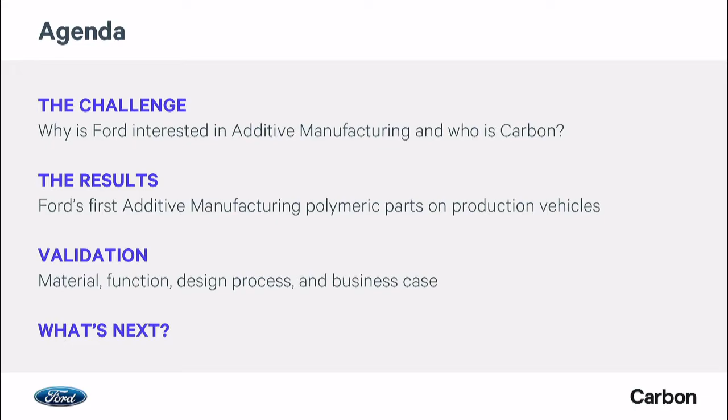So here's our agenda for today. We're going to go through and present together, with first the challenge. We'll start out with why Ford is interested in additive manufacturing, why do we care, and a little bit about the journey that we've seen with additive manufacturing yesterday, today, and tomorrow. Then I'll hand it off to Paul, who will talk a little bit about Carbon, the company and its technology and advantages. Then he'll introduce the 3 production applications in our results, where we're getting value from using additive manufacturing for our vehicles. And then I'll come back and talk about some of the validation details of how we validated the material, the function, the design, and the production process, and importantly, the business case. And then finally, we'll both talk about what's next for each of our companies.

So first, why do we care about additive manufacturing at Ford? Essentially, the attributes of additive manufacturing, namely that we can make a 3-dimensional part without the need of a mold or a tool, in addition to the design freedoms of those parts that we can make, provide us with values in efficiency, agility, and performance.

In terms of efficiency, as Pete mentioned, we've been using additive manufacturing for quite some time to make our design processes a lot more efficient, to go through quick iterations in our prototype parts because we don't have to wait for that long step of tooling. And as the technologies and materials continue to improve, we're able to go further along that functional testing and prototyping step, making our processes even more efficient.

And today we're also using additive manufacturing for those tools and fixtures on our manufacturing floor in our facilities to make those processes more efficient, not only to make the fixtures faster and more ergonomic, but those fixtures work better, providing us with efficient processes on the manufacturing assembly and a more quality product.

For agility, additive manufacturing technologies and their benefits allow us to more nimbly respond quickly to the dynamic changes in the market and our complex supply chain. For example, we can quickly respond to niche markets or low volume opportunities that we couldn't do cost effectively with a hard tooled solution.

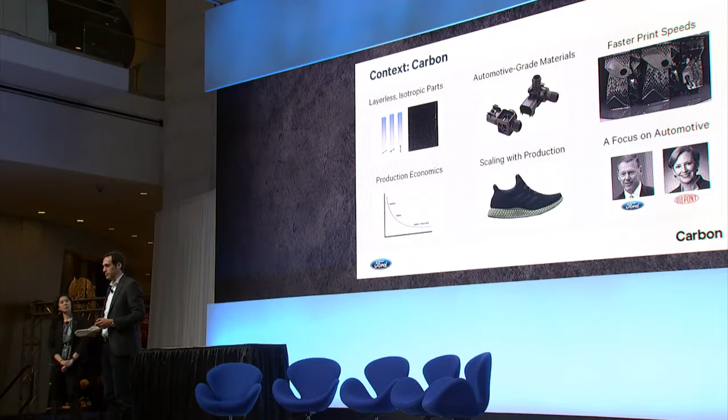As Ellen mentioned, we've been working quite closely, especially over the last year and a half, to help support Ford's goals of using additive manufacturing for production in order to improve efficiency, agility, and offer parts that have superior performance. We're going to talk about 3 applications here today that are production applications of end-use parts. The first we're going to focus on is an example of improved efficiency for service parts, for spare parts.

Additive manufacturing has long held the potential of being of great value for MRO, for service parts, for spare parts, especially for late model vehicles, for older vehicles. This application is an HVAC lever arm used to open and close vents in an HVAC system for an older Ford Focus. This part was originally produced with 30% glass-filled PBT material and injection molded.

But Ford needed to have some new parts made, and it would have been quite time-consuming and expensive to get the tool out and produce these new parts and then have those parts sit in a physical warehouse and have those parts kind of in inventory as well as on the books. So Ford qualified our materials, our epoxy material, as well as our process, and ultimately began producing these parts on demand from a digital file.

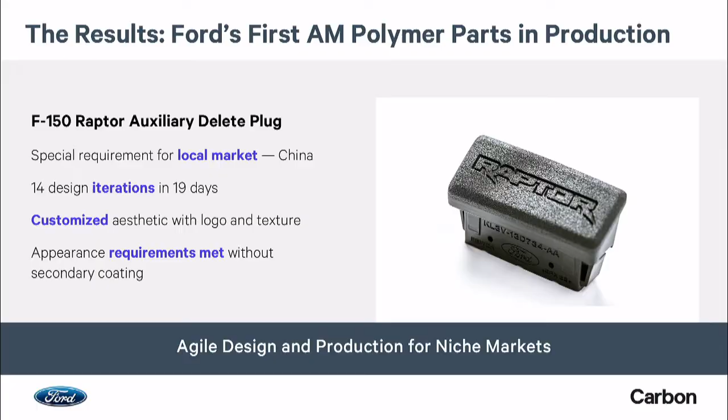It's a relatively low volume scenario for the Chinese market, and it would have been quite expensive and time consuming to stand up a tool, to design that tool, stand it up, and then produce the parts. One of the great values associated with our process is the ability to quickly design parts, print them, and then test those parts and be able to cycle through many different designs in a short period of time. That's what Ford was able to do here, going through over 14 designs in 19 days in order to design and test the parts that are now part of that F-150 Raptor for the Chinese market.

So they were able to get the right design, and during that process also experiment with different looks, different textures, different lettering, because all of that is essentially a free part of the process. It's just a digital file, so we can quickly and easily add textures, we can add logos. So the Raptor logo is prominently displayed on this delete plug, making it a visually pleasing and aesthetically nice part. This is just an example of how Ford is able to economically make parts for low volume production.

And then the third application we're going to focus on here is one that highlights the ability to take advantage of the design freedom that comes from an additive process, in order to produce a part that performs better, offering some superior advantage relative to what would be possible with injection molding.

This is a bracket that holds a cable associated with an electric parking brake system for the Mustang GT500, which was just announced earlier this week. In prior versions of the vehicle, the bracket would have been stamped out of steel, and there would be two versions, a left-hand version and a right-hand version.

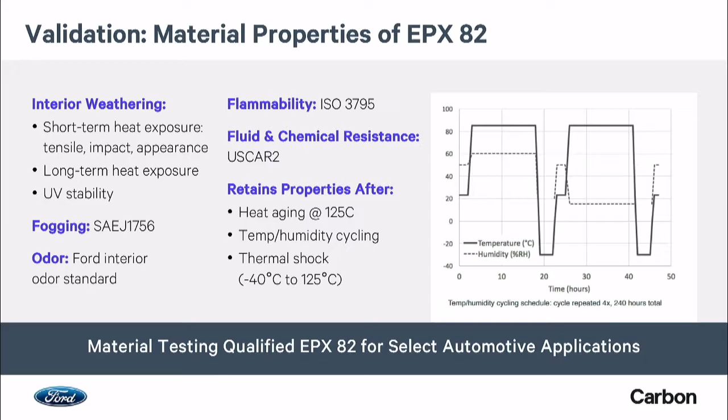For example, in our interior application with the Raptor delete plug, not only did we have to pass fogging, odor, and flammability, as do typical interior components, but the most challenging part was to pass all of our interior weathering specifications. So for that particular application, after exposure to the amount of UV that part is subject to, we not only had to retain properties, but also the appearance of the part, as Paul talked about, because there was no secondary coating protecting it.

For both the interior and the underbody application for the EPB brake bracket, we had to look at fluid and chemical resistance for all sorts of chemicals, ranging from suntan lotion for interior applications to motor oils for underbody applications, which all passed.

And then finally, for both the climate control application in the HVAC lever arm, as well as the EPB bracket in the underbody, we needed to consider elevated thermal performance and heat aging for different scenarios and exposures. So these families of applications that we tested are qualified for future applications as well for EPX82.

Great. So the next step was looking at the functional validation of each of the parts. These consisted of component level testing, vehicle level testing, as well as assembly level testing when we had to assemble the parts into the vehicles themselves.

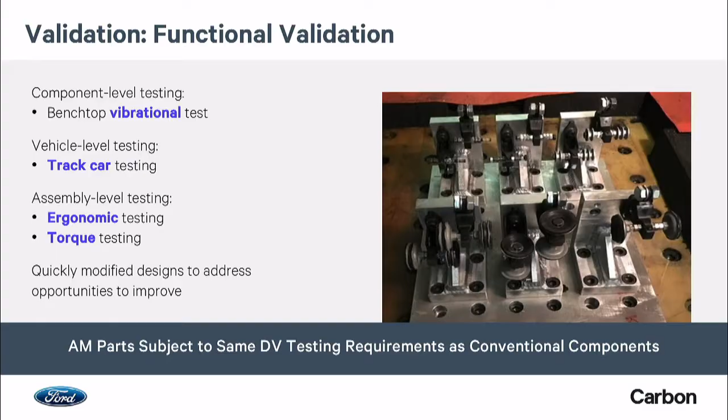In addition, things like on-vehicle testing on the track allowed us to test for any potential stone impact functions that the bracket would need to survive.

And finally, a lot of the ergonomic level testing that Paul alluded to, with the team of engineers, as well as torque testing for some of the loading for that functional part, were conducted. Similarly, for the lever arm, that function was tested as well. They're subject to all of the same design verification test requirements as our conventional components and did pass all of these.

Next was really to understand the validation of the process and the production manufacturing at a production level. The parts were designed so that we could ensure repeatable and reproducible results from part to part on the print platform, from print to print, and from machine to machine, to minimize any variations we would see in the parts.

Along the way, we created DFMEAs for each part per their engineering requirements, as well as PFMEAs to understand the entire process, following a standard PPAP, or production part approval process. This paved the way for future additive manufacturing applications, helping us understand the differences from conventional manufacturing. We did find some distinct advantages using the digital workflow of additive manufacturing over conventional manufacturing.

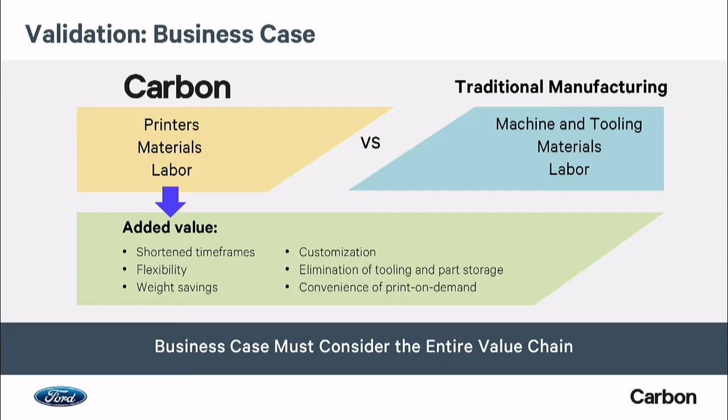To summarize, we found that the advantages Carbon's additive manufacturing technology provided, including the speed, the robust and durable materials, as well as the design freedoms we were afforded, allowed us to reach the goals for automotive value in efficiency, agility, and performance.

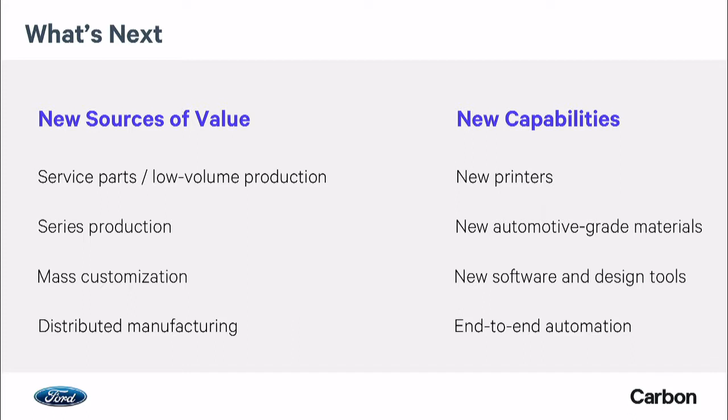So what's next? At Ford, we're continuing to look for new sources of value, continuing to migrate service parts and low-volume production where it makes sense, as the technologies and materials are ready and as we develop new, improved, faster, and robust materials. In addition, we're looking at series production applications, moving towards higher and higher volume, as well as mass customization, and then being able to realize distributed sourcing and distributed manufacturing to print what we want, where we want it, when we want it.

And I'll hand it over to Paul now to talk about what's next for Carbon. Thanks, Ellen.

Carbon recognizes that we're really at the early stages of this journey of moving to production applications in the automotive industry. The automotive industry appropriately has a very high bar of what's required. We're thrilled to now have Ford's first production applications using an additive manufacturing process for polymers in production. But we know that we at Carbon need to continue to develop our own capabilities and enhance what we offer.

That includes new printing capabilities, including larger build platforms and new features associated with our hardware. That includes, importantly, more and more materials for automotive applications. We have the EPX 82 material, which was used in these applications referenced today, and we have a roadmap of materials coming out this year and next year that offer different kinds of characteristics, higher temperature performance or different types of impact strength, as examples.

We're going to continue to develop more materials for the automotive market, which opens up different kinds of applications and allows you to take advantage of these capabilities for different parts. We also believe there's a lot of opportunity on the design side to take advantage of things like topology optimization and lattice designs, producing structures that weren't possible via injection molding.

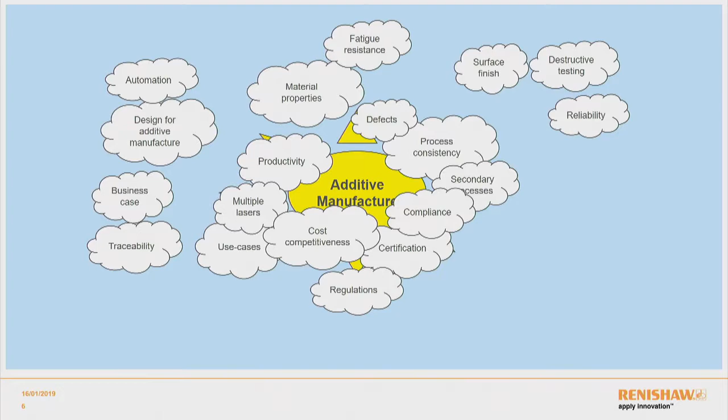Immediately, once you start drilling into those particular areas, we start having secondary areas where we need to drill down further into detail. Eventually you get to the point where there is no more hype because it can't actually shine through, and there seems to be this overwhelming need to fully understand the technology before we can incorporate it in our manufacturing environments, particularly in areas where we want volume production, such as automotive.

Renishaw has encountered this before in the metrology market. Renishaw is most widely known for our manufacturing of probes, CMM equipment, machine tool equipment, and automated gauging. So our business is process automation and control. That's where people generally know Renishaw. Whenever we show additive equipment, the number one thing people say is, oh, I didn't realize you did 3D printing as well, I always thought you guys were just the probe guys. So in order to change that, we're constantly putting out this message that automation of process and control is what additive is all about as well.

So in order to bring the technology into widespread use, Renishaw is ideally placed with our history. One of the ways we went about achieving that with industrial metrology was through this ethos around the process control pyramid, wherein the products we designed and developed could be categorized according to the role they filled in the manufacturing environment.

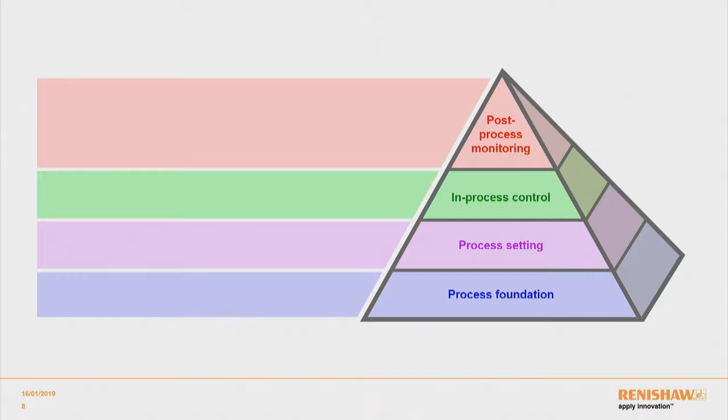So for example, in the process foundation, we're talking about calibration and performance products, such as our ball bar products or our laser calibration products. We're actually trying to make sure that the machines we're working with, CNC mills, lathes, whatever, are actually capable of achieving the tolerances we're aiming for in the first place.

Secondarily, we've also got machine tools, so we're talking about process setting and in-process control. This is the idea of making sure the workpiece is actually set up as we require, the tool is behaving how we require, and we're monitoring tool wear and adjusting accordingly.

In-process gauging as well, so you're taking the part off the machine onto a gauge and very quickly, in an automated fashion, getting an understanding of how in control the process is. So we can very quickly identify whether we need to make adjustments to the process on the fly, for example incorporating or modifying offsets in response to tool wear and things like that.

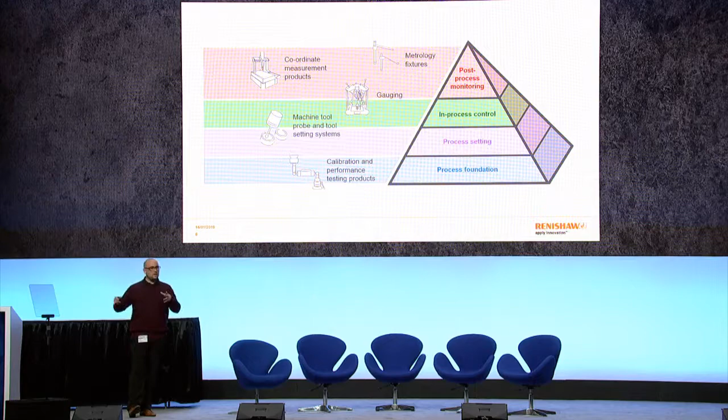And then finally, the stuff Renishaw was always best known for was the CMM inspection equipment and stylus equipment, but also the fixtures on which all of this metrology work is done. It's no good having all this fancy equipment if you can't trust the means in which you're setting it up in the first place. So Renishaw moved into developing those products as well.

So without veering off too much into metrology and the deep darkness that can go on there, what I actually want to do is tell you how with additive we're taking this similar structured organizational approach and trying to apply it to a technology that can, on first appearances, be so vast and complex as to appear impossible to get under control.

So the process foundation equivalent for Renishaw is our solution centers. In our solution centers, we're all about a two-pronged approach where we're developing competence in our customers, and that's not intended in a pejorative sense. That's saying competence is knowledge through education, skills through training, and experience through practice.

Secondarily, we're then working on developing the solution our customers are using, actually working in the technological sense of developing a product for a specific material processing strategy and a specific platform.

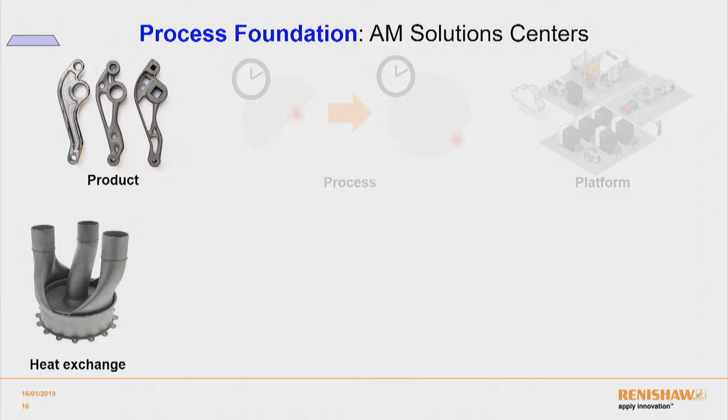So in terms of product design, we're talking about a handful of specific application types. Whether we're working with HIETA in heat exchange products, or with competitors in the America's Cup on hydraulic control devices, or with Ferrari Formula One on engine components, or with automotive partners in the development of productionized solutions for production volume of AM components.

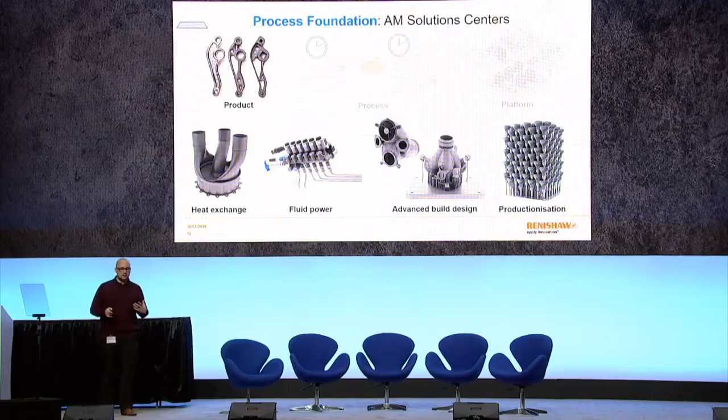In terms of process development, we're working on helping our customers understand how to develop the alloys of the future. All of the additive players provide standard parameter sets for processing the various powders available, but Renishaw goes a step further, providing customers with the tools to actually develop their own material properties for specific applications—alloys that may not even exist yet.

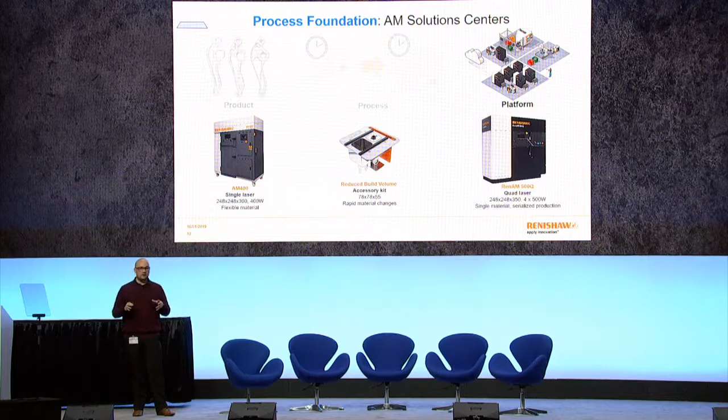None of this is worth anything without selecting the correct platform for the processing to take place on. Whether that's one of the single laser flexible material machines everybody is familiar with in the industry, or one of our multi-laser systems where we're increasing productivity massively to meet the demands of the automotive industry. In between we have accessory kits where we can reduce the volume of powder required for development work. So rather than committing to hundreds of pounds of powder, a company can start doing development work with maybe a dozen kilos or pounds of powder - much smaller volumes, much less investment up front, all done on a Renishaw premises with Renishaw staff, enabling much faster cycle development times.

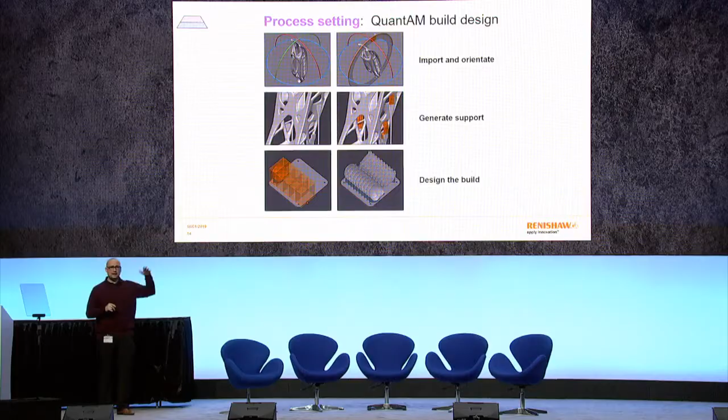Our equivalent in additive of process setting would be the build software we use to actually generate the build designs. Renishaw's solution to this is our QuantAM software. Practically speaking, build software is build software - they all pretty much do the same thing, and QuantAM's no exception. It's not necessarily doing anything over and above what competitor software does - in fact, in many cases competitor software has features QuantAM doesn't have. But the reason we developed QuantAM in the first place is because it was a stripped back, ready-to-use piece of software for our machines where we trimmed off all the fat. We only put in features relevant to our users of our equipment. But it also meant that tools that exist in other software packages could be developed specifically, and their performance could be improved and increased when a user is using a Renishaw platform machine.

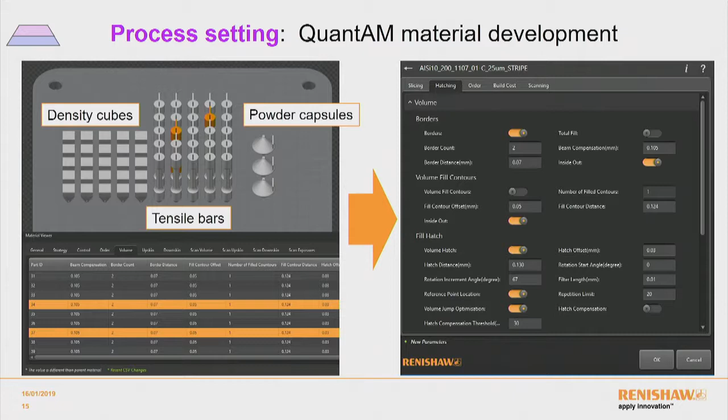For example, our material development tools within the software, which we train our customers to use so they can develop their own alloys, give us the ability to very rapidly iterate and adjust laser parameters - things like power, point distance, exposure time, all of these variables. In fact, in the Renishaw equipment there are 174 different variables that can feasibly be adjusted, so the user can produce a distributable parameter set that can be locked down and distributed within the manufacturing environment of the company.

Similarly, for the multi-laser systems, because we've developed our own software, we have our own means of enabling a user to assign lasers in the build volume. Two examples here might be where you have a number of parts on a plate and then a single large part. In our software, that enables you to go with a number of different strategies - for example, assigning one laser per part, which is typically the most efficient way to do it, particularly when operating in multiples of 4, when you have 4 lasers. But things to bear in mind when using multiple lasers and multiple parts is how those lasers interact with one another - that's where material development training loops back around and that iteration work gets involved.

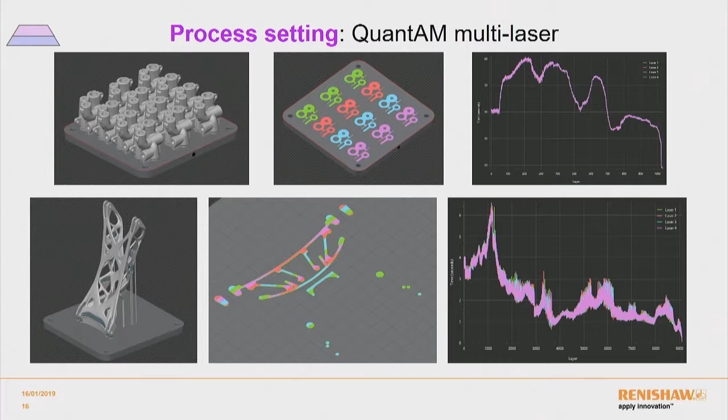Also, when using multiple lasers on a single part, you're interested in how the lasers interact at the boundaries of the area where they're scanning on any given slice. These are all factors that need to be taken into account, as is the actual utilization of the laser. In the example with the 4 hydraulic manifolds in the top row, we're assigning one laser per part and scanning left to right, which gives us the best utilization - you can see there's no overlap between any of the 4 traces. In the bottom traces, there's overlap where lasers are idling during any given layer. It's through software tools in QuantAM that we can help minimize those idle periods.

In-process control is one of the buzzwords going on with additive at the moment. The fact of the matter is that there isn't really a great deal of in-process adaptation and closed-loop control going on in the additive industry. And what there is, it's iffy at best, okay?

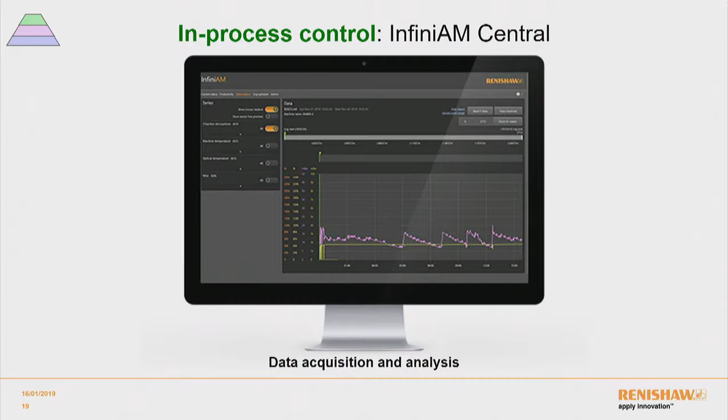Renishaw's approach at the moment is two-pronged. We have two products in particular: InfiniAM Central, which is essentially a data capture and data acquisition device, and a data interrogation device. For example, seeing the status of machines in a workshop, the productivity of those machines, the sensor output like temperatures, pressures, voltages, allowing remote troubleshooting, particularly useful in large manufacturing environments where service engineers might not be on site. We can potentially help to remotely diagnose issues. But also the need to have access and administration controls for various aspects of the manufacturing process, so uploading files, accessing data, and so on.

And also everybody's got to have a mobile app, because it's 2019.

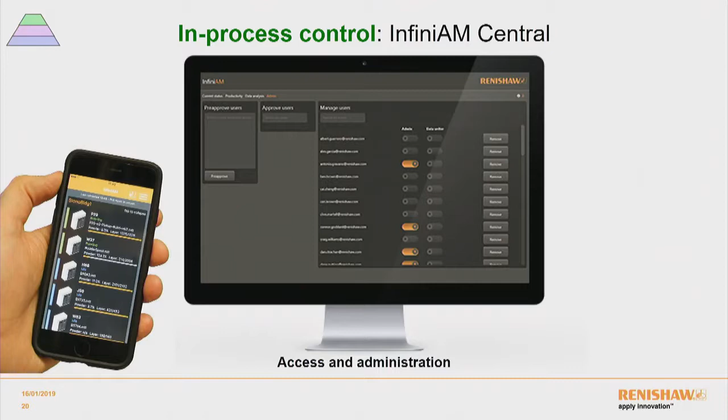The other aspect of in-process control is the one that's getting everybody excited. It's where we're actually capturing data directly from the build itself. Because Renishaw is a manufacturing company in additive, which is somewhat unique in that our machines are manufactured entirely by us. We're not a black box user wherever we can help it. That means the degree of vertical integration we can achieve with our products goes far beyond what else is happening, okay? And that's a double-edged sword, because it means not only do we have total control over what we're doing, it also means we're learning all these lessons on our own, and going into areas that have never been touched before.

So one area where that's particularly exciting is that we 3D print components for our own machines. The 500Q Galvo block for our 4-laser system is actually printed on the machine itself. We have prototype machine 1 that started printing the others, and so on and so forth. The benefit is that additive design ideals, such as conformal cooling and geometric complexity, are incorporated in the design of this component, allowing us to make a much smaller unit and get the lasers much closer together, processing through a single window.

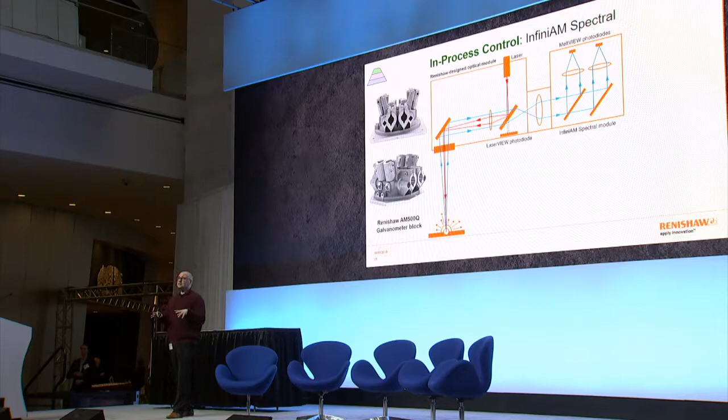Without going into too much of the nitty-gritty, what that means is any single laser in our 4-laser system can scan anywhere in our build area at the same time. So in theory, all 4 points could follow each other around a single spot if we wanted them to. Many competitor systems can't do that, because each laser has a separate window, and the build area is actually split up into different areas addressed by a single laser. So we have the flexibility to do very different things.

Another thing that gives us flexibility is the ability to insert and install laser sensors and melt pool sensors inside the machine directly, because we design the galvanometric system ourselves, so we're not having to compromise. For example, our InfiniAM Spectral system has LaserVIEW embedded within the system, but we also have MeltVIEW embedded directly in the system. That gives us the ability to get feedback on energy emissions, but also feedback on positional data as well.

That means we can start building 3D models of data that we can go and view post-process, viewing two builds side by side and comparing the data. In other words, what we have at the moment is an in-process gauging system, like our Equator system functions in a manufacturing scenario, where we can actually check the performance of the machine during a build and, in theory one day, make adjustments as we go.

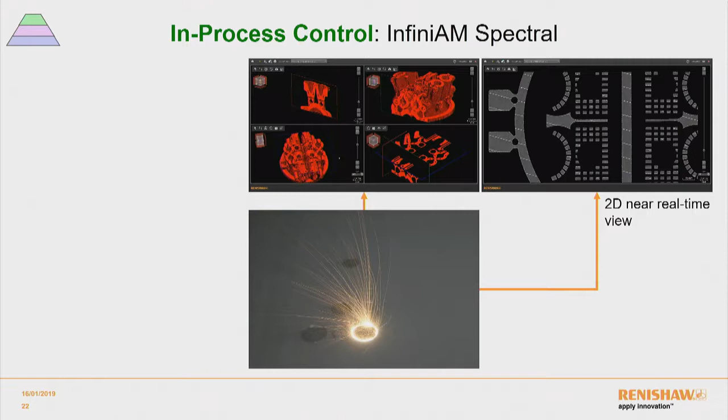Okay, so some example outputs. You've got your melt pool there. What we actually get out in the data format, we can, at the end of a build, program into a 3D rendering, which allows us to zoom in, slice layers and things like that. But immediately, almost in near real time, actually at the end of a layer when it's compiled and uploaded, we can view 2D data pretty much immediately. The 3D data at the end of the build, we can then start rendering the full model and comparing it to the slice data that we generated.

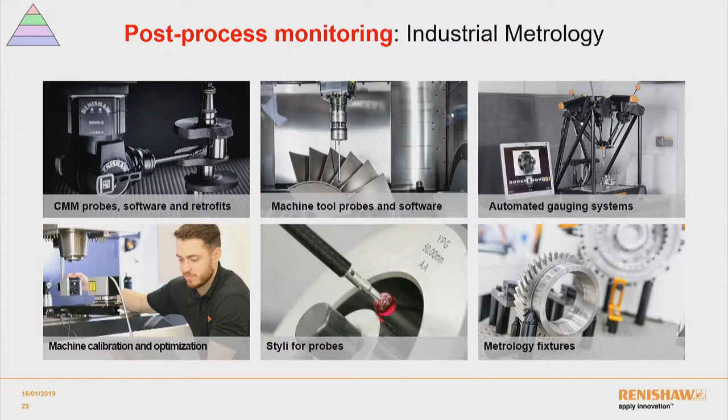And then the post-process monitoring of additive is obviously a large area. I'm not going to spend too much time here, because at Renishaw, that's what we do. So we don't really need to spend a great deal talking about it, because people know that that's what we do already. The inspection and control of machined parts in particular, but also increasingly additive parts, we're already set up to provide the solutions for that as we go.

So to summarize, because this is the kind of topic where I was hoping we'd get plenty of questions, basically the solution we see for additive is very similar to the solution we see for metrology, in terms of an organized structural approach to the number of problems additive can raise. Whether it be process control, process inspection, design for additive manufacture, or development of new alloys.

Renishaw has got a global overall strategy for trying to handle that development and ensure the customer gets back through to seeing that bright hype again, and getting excited about the technology rather than nervous about it. So with that, I'll wrap up the presentation, and if you guys have got questions, we've still got 10 minutes to go through some.

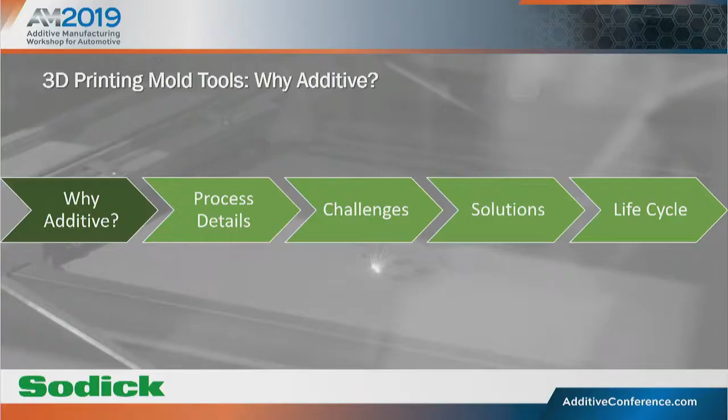So our big focus at Sodick is in 3D printed mold tools - injection molding tools and extrusion dies, that sort of thing, that utilize 3D printing to innovate and improve the performance of these tools. Probably the biggest thing most of you are going to be familiar with when it comes to 3D printing mold tools is conformal cooling.

It's a topic that there's been a lot of buzz around, but I think in terms of industry adoption, it's still been a little reticent compared to where it can be given the substantial gains we can make. As part of this presentation, I'll cover what these gains look like, what the process is to produce these additive tools, and also what some of the challenges are that have inhibited progress to this point, as well as some solutions to get around those challenges.

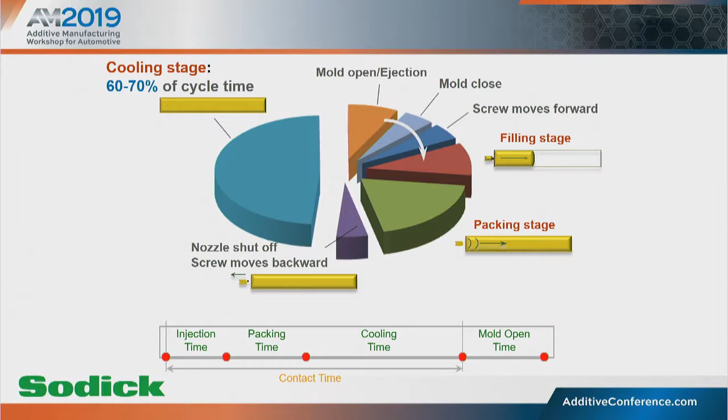So the reason conformal cooling has been such a big topic comes down to what the actual cycle of a plastic part looks like. When you look at the cycle of a plastic part - mold open time, mold close time, filling stage, packing stage - these all have relatively small times within that total molding cycle. Where you actually see the biggest time waste is in the cooling stage, which at its worst can take up to 60 to 70% of the total cycle time of that plastic part.

But this is actually an opportunity for improvement moving forward, because if you have this disproportionate time scale for the cooling stage, it means any improvement you can make to that cooling stage will also have a disproportionate effect on the total cycle time of that plastic part. So this creates a really great opportunity for reducing cost and improving efficiency of manufacture of those plastic parts.

Looking at one example, this is a seatbelt clip that we've actually been producing at Sodick for one of the large automotive manufacturers. In our original design, we used standard two-dimensional gun-drilled water lines. But that design had about a 20-degree delta from the hot spots on the surface of that mold to the coolest points on the surface of that mold. And what that ended up doing is giving us deformation of the part that was more than a millimeter, and a relatively long cycle time for what the part was.

In the course of switching over to a 3D printed mold that used conformal cooling, we virtually eliminated those hot spots. We created a delta that was basically 1 digit rather than 20 degrees, and we were able to eliminate the projected deformation of that part down to 0, which is quite successful. In practical terms, we reduced the scrap rate of those plastic parts while also improving the total cycle time by around 22%, which is pretty substantial.

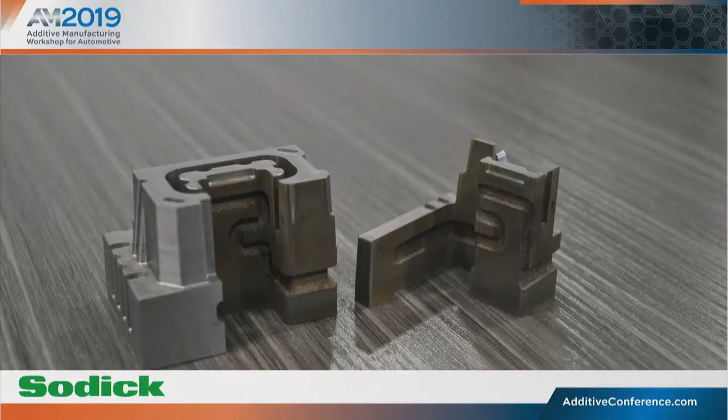Let's talk about another example. This is an electric vehicle connector mold which we've also produced. You can see in this cross-section the conformal cooling lines - they're actually built into the mold itself.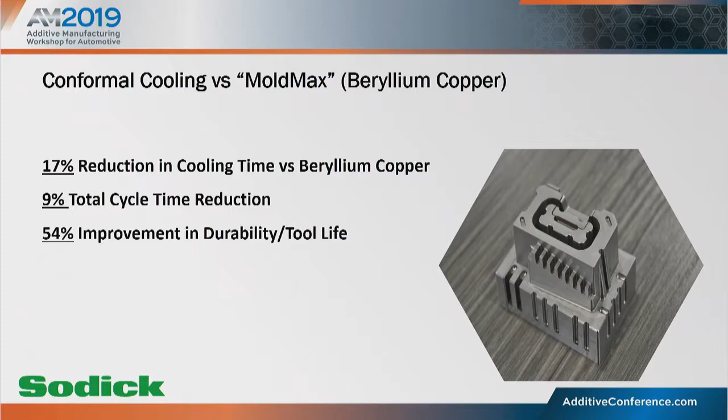One of the questions that comes up, and this is a great example, is comparing conformal cooling - being a new process that requires a steeper learning curve and some specialized equipment - to existing solutions. Why not just use a beryllium copper or some other specialty material with really great thermal properties to make an insert, as we've traditionally done over the past decade or so?

Well, the reason is this. Not only is beryllium copper and some of these other specialty materials expensive and difficult to work with traditional EDM equipment, partially because of that conductivity, but the performance gains still are limited. What we see here, even with conformal cooling versus beryllium copper, is that conformal cooling produces still a 9% reduction in total cycle time of that mold.

But where you see real gains is you actually improve the life of that tool by over 50%. That means a tool that would have gotten 20,000 shots could now get 30,000 shots by switching from beryllium copper to a 3D printed steel.

So that's some of the impetus for where the added value can be for 3D printing. But in order to really understand where it can be and what some of the challenges are for implementation, you have to dive a little bit deeper.

The process itself is relatively straightforward. Most powder bed 3D printers, which make up about 80% of the market, operate in fundamentally the same way, where you have a stationary powder bed of 20 to 40 micron powder that is selectively melted by either an electron beam or a laser, producing a melt pool in the profile of the part you're creating. You then add new material on top, use that same laser to melt in profile on top of the previous part, and those two layers bond together.

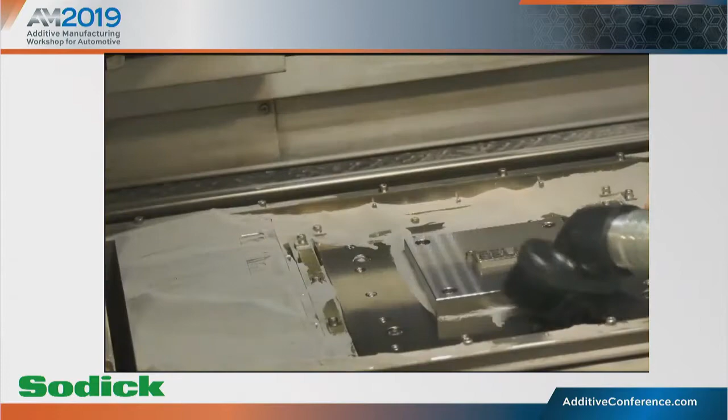But here you can see the final layer being sintered as well as machined in process to produce your finished part. So after evacuating your chamber, what you ultimately end up with is a solid piece, which in this example is just essentially a trinket or a test part. But those hollow spaces could easily be conformal cooling channels, detailed surfaces, anything that you'd need it to be.

So the process is mostly straightforward. So why has it been such a challenge for the most part to implement some of these really revolutionary technologies and experience the gains that you could achieve?

Well, probably the number one limiting factor has been the limited accuracy of 3D printers up to this point. So in general, 3D printing has been considered a near net shape process, so you're never really able to achieve a finished part historically. Because of the internal stresses and the lack of accuracy from the lasers, normally you'll have to leave machining stock on that part. Heat treatments for these parts, which normally has to be done, will cause movement in the steel.

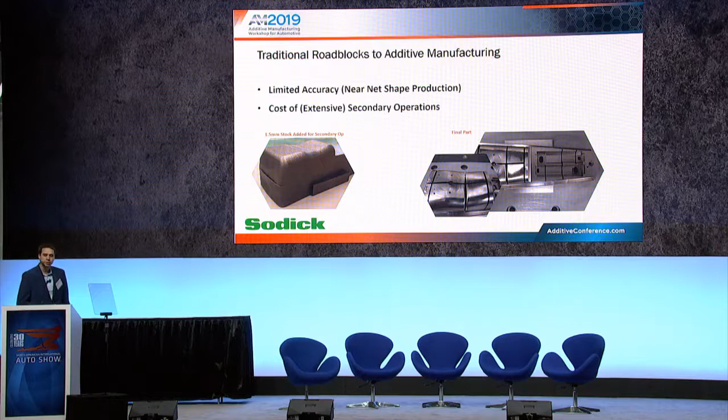The lack of laser accuracy leaves a pretty rough surface finish, so we're leaving, in general, about a millimeter and a half of machining stock on top of these parts, just to ensure that those conformal cooling channels are in the part and that those surfaces can be equally accurate. So you can see here on the left, we have the as-printed part, which is basically just a solid piece of rough steel, versus the finished part, which has considerably more detail. It has deep ribs, it has through holes, lots of features that aren't reflected on the part as printed.

One of the problems with this, in addition to adding extra processes, is that it adds significant cost. So you've added the cost of purchasing and utilizing a 3D printer, but now you still have to do your machining, you still have to do your stress relief, you still have to do all of these other operations that you normally do in order to produce a 3D printed part.

One of the biggest challenges in achieving that has been the internal stresses of that part. It is a hot process done layer-wise, which means there's going to be a thermal gradient across that part, which is going to cause those stresses to express themselves in unusual ways.

One of the other roadblocks for using 3D printing for producing mold tools is the impact that it has on venting. So a lot of streamlined designs for mold tools allow you to reduce assemblies into a much lower number of components for those tools. Part of that process ends up eliminating a lot of the parting lines that would traditionally allow for venting of those molds. The incentive for using those lines for those molds is that you're going to be able to improve part quality, you'll reduce overshot, you're going to reduce burn marks - a lot of these elements that would reduce part quality and end up increasing your scrap rate.

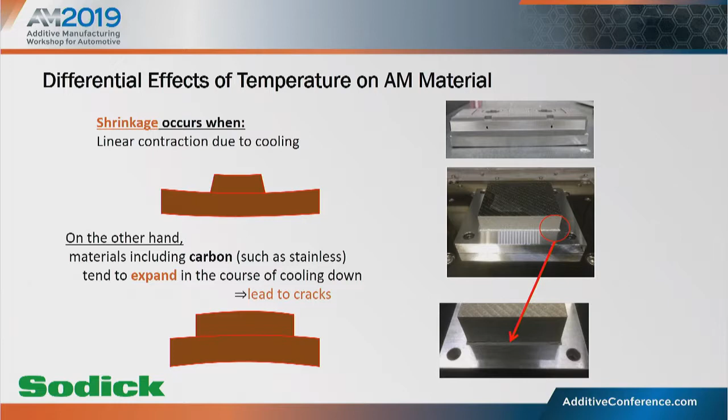Depending on the material you're using, it can have differential effects of temperature on that material. Materials that lack carbon will have very traditional linear contraction when it cools and linear expansion when it is heated. So as that part is cooled after that hot process, you'll see the part contract and have almost a potato chip effect. Whereas materials that contain high levels of carbon actually see expansion during that cooling process because of some of the changes that are occurring in the microstructure of that material itself.

This is one of the biggest challenges of trying to predict the thermal deformation of those parts as they cool after they've been printed. And this is one of the reasons for leaving so much machining stock on those parts.

But in part, these transformations are actually predictable based on some of the chemical composition of those parts themselves, particularly carbon, which has a very predictable change in the crystal structure that will determine just how much it expands during the cooling process. Which means if you can balance that expansion with the anticipated shrinkage due to heat, you can actually achieve a much more stable part and have a much more reliable tolerance across that entire part.

What that means ultimately to you is that your lead time is reduced, your part quality goes up, and ultimately 3D printing looks like a much more achievable option.

So in 2018, just this last year, there was a patent issued on this technology to Sodick for stress relieving in process some of these high carbon steels.

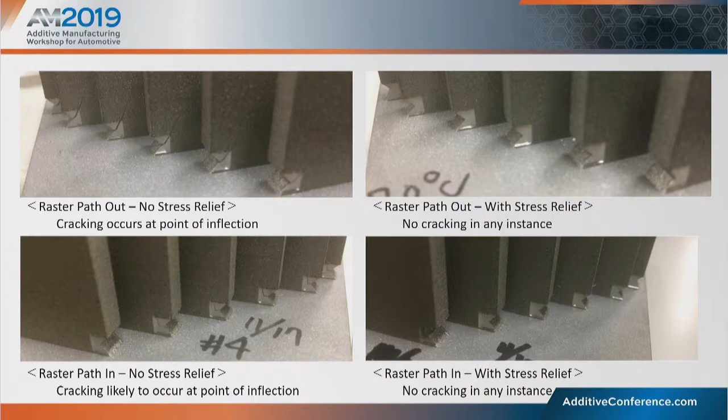So what does it look like using this stress relief process versus not using it? On the left, with no stress relief process, it's very predictable exactly where cracks will start to form due to stress. You can see these notches, these points of inflection, where cracks traditionally form. But on the right, you can see these very same notches, and there's no cracking occurring in any instance on any of these test samples.

All of these tokens are produced stress relieved before they ever leave the machine, which means you're not worrying about cracking, you're not worrying about that part changing shape after it's been made, which means the amount of machining stock and secondary operations you're performing is significantly reduced.

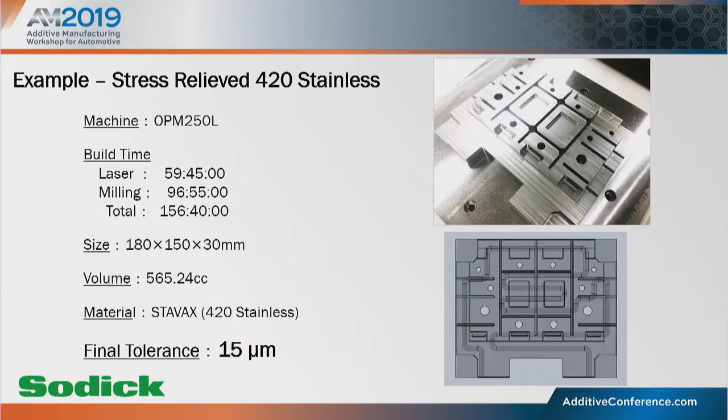Here's an example of a part made in 420 stainless steel, a material that's been a real challenge for a lot of 3D printer manufacturers because of how sensitive it is to temperature, with a very high rate of change across the part as temperature changes. This part is about 180 millimeters by 150 millimeters, and across that entire length, after removing it from the base plate and the machine itself, it maintained a tolerance of about 15 microns, which for a high carbon steel is unheard of.

This type of technology has a lot of application for not only other high carbon steels, but also other materials that have unique properties when exposed to temperature or unique problems of internal stresses. So it creates a lot of opportunity for new and innovative materials that have previously been a real challenge for the 3D printing industry as a whole.

This creates opportunities not only for exotic materials, but also those materials that are very well known to tool makers, like D2 and H13. Looking a year down the pipeline, they might look a lot more reasonable than they have to this point, where they don't exist.

Going back to the issue of venting, we can talk about controlling some of the characteristics of that metal based on the build process. A lot of the time, high density is very desirable - a high density part is more durable, and you can get it to a higher polish so optical molds can be achievable. These things are all very desirable. But when it comes to venting a part, sometimes that porosity can actually improve the performance of that part, in situations where you're getting burn marks because of gases that aren't being released.

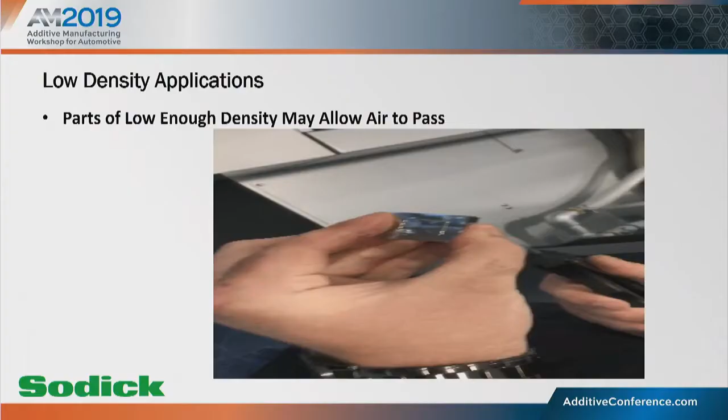You can actually see here a piece of steel we've 3D printed, where you can see air passing through the pores of that steel. So actually being able to characterize the properties of these materials based on the settings you're using - the laser speed, the laser power - having these known variables lets you selectively control certain areas of your part in order to produce optimal venting conditions.

This is another area where design consolidation and streamlining your mold design doesn't have to mean worse venting. It can actually mean improved venting.

Finally, let's talk a little bit about the mold life cycle. There are a few specific questions that come up repeatedly, one of which is caring for a conformally cooled mold. A mold with very straight water lines can seem a lot more straightforward to clean, and a lot of the time people will wonder, if I have this very serpentine cooling system in my mold, how do I get that cleaned?

There are actually a lot of products on the market commercially available that are more than capable of cleaning those water lines. One - not even a Sodick product, but just one we happen to use - is called water reamer, which basically uses pressurized water with a little bit of acidic additive to run through those water lines and clear out a lot of the corrosion, a lot of the scale buildup, regardless of the internal geometry of that part.

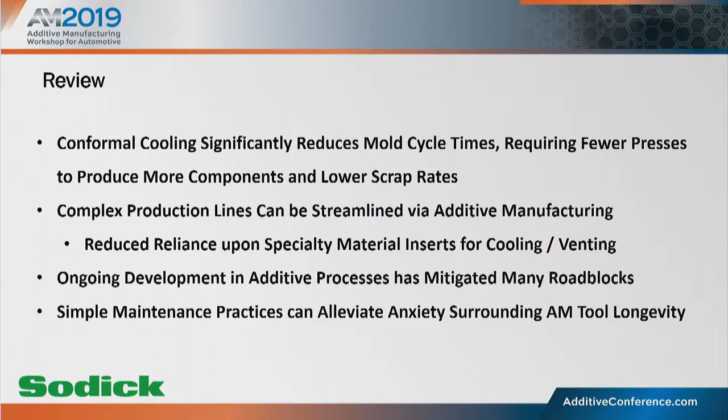So just to review, conformal cooling has real impact on the cycle time and the cost of plastic parts being produced. But there are certain roadblocks on the path to having full implementation of 3D printing processes for your mold tools. Ongoing development in the 3D printing technology can improve your tolerances. It can improve the life of your mold. And I think that taking a step back and seeing the forest for the trees can actually allow you to see that maintenance of these molds is not as complicated as it might be perceived to be.

There's no reason that cleaning water lines or repairing a mold is any more difficult on a 3D printed mold than it would be on a traditional mold. So I think some of these roadblocks might be simple perception errors, and some are just the state of the technology as it's been previously. But by keeping an eye on the future of the technology, the new patents coming out, the new features coming out, I think we can see a lot of ways where roadblocks that might have made you think twice a year ago might be non-issues today. Or they might be things you want to take a second look at now and see, is this something I can get real value from based on the technology that's available?

One thing I do want to point out, we do have a local supplier right here in Detroit. Proper Group is a supplier of mold tools and plastic parts. They utilize 3D printing technology for these types of applications. So for people interested in experimenting a little bit with the technology, but that maybe want to get their feet wet before investing close to $1 million in a machine, going through a vendor like this might be a great way of experimenting with some tools that could add value without exposing yourself to some of the risk of investing before you're ready.

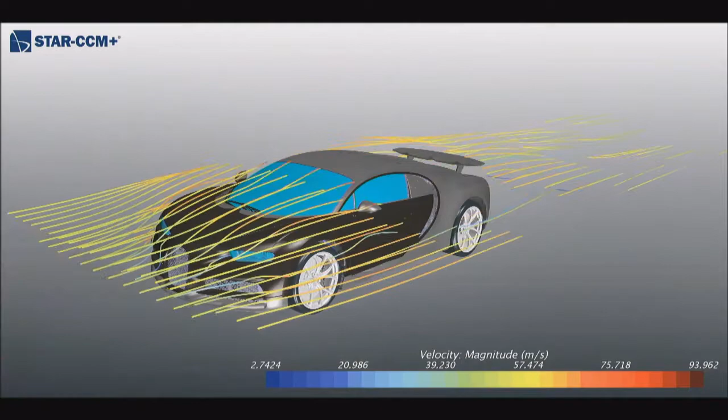So one of the challenges was: for a vehicle that goes that fast, the wind tunnel only has a capacity of roughly 186 miles per hour. So how do you design something when you can't actually get the data within the wind tunnel?

What we had to do is create a digital twin of the vehicle, then collect the data real time from the drivability of the current vehicle, and take that data and import it into the digital twin of a digital wind tunnel. So we use the simulation capabilities to simulate what would happen at 280 some odd plus miles per hour.

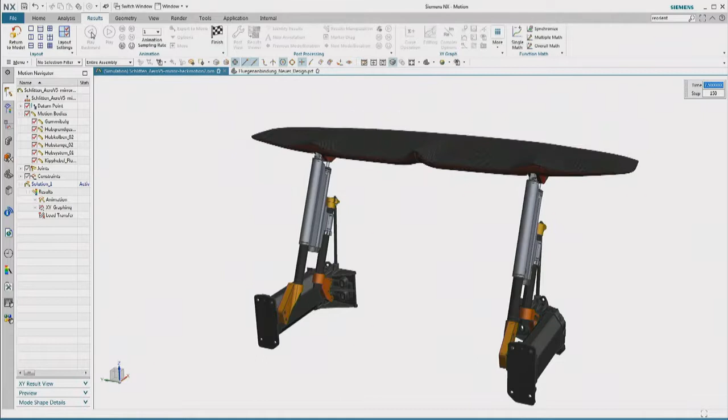So when you look at the wing on the Bugatti, it serves a number of purposes. It allows the car to be more stable at different speeds and driving dynamics. But at the same time, it also functions as an air brake. When you're north of almost 300 miles per hour, you're going to have to stop quickly, and the brakes are going to need a little bit of help. So that's what you see here, a simulation of that in the actual CAD.

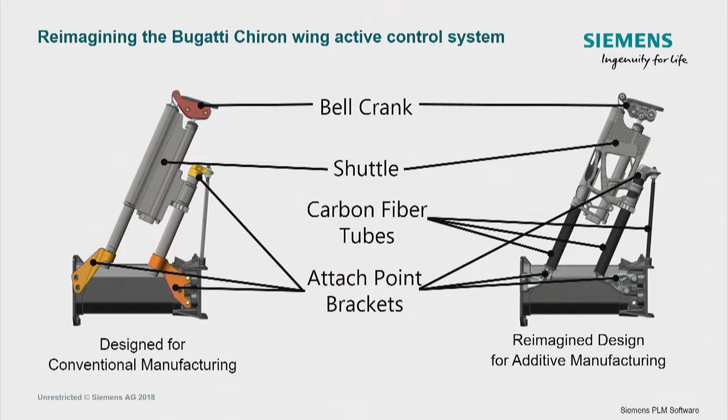Working together in partnership, what you see on the left-hand side is the original design, pretty much hindered by conventional manufacturing modes - you had your limitations, and this is what the design looked like. As we went through the whole design for additive manufacturing process, you see the reimagined design on the right-hand side, considerably different. If you look at the bell crank, the shuttle, you see a lot of material removed, light-weighted. The tubes are now made out of carbon fiber, and the attachment points have also been light-weighted. Considerable difference.

So how did we get there? If you look at our whole process of what we call the digital enterprise in creating a digital twin of a product, we want to make sure we do everything in a virtual environment that we possibly can, from designing the part to actually simulating the product, validating that design, and then when we get into production, validating the production component.

In this case, we're using one product to actually do the design and validation, and then as far as printing, to validate that print process in the virtual environment in the build envelope, so that when we get to the point of real production, we don't have a lot of surprises.

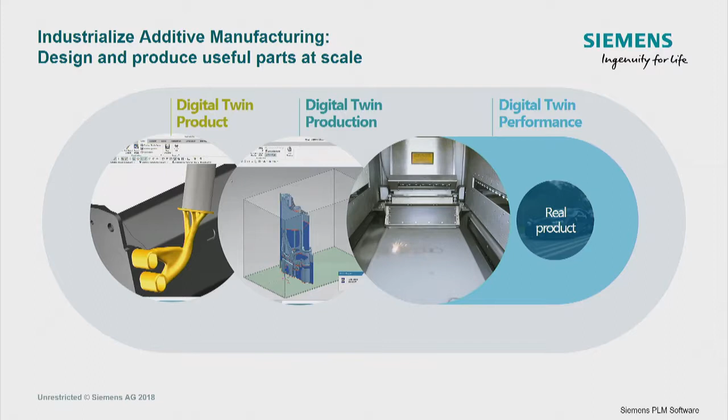In a conventional mode, we've been doing this for a long time, managing the entire process and validating. Specifically, a lot of our customers, before they put a shovel in the ground, already know what that product is going to do, how the manufacturing facility is going to look, and what type of production capabilities they're going to have.

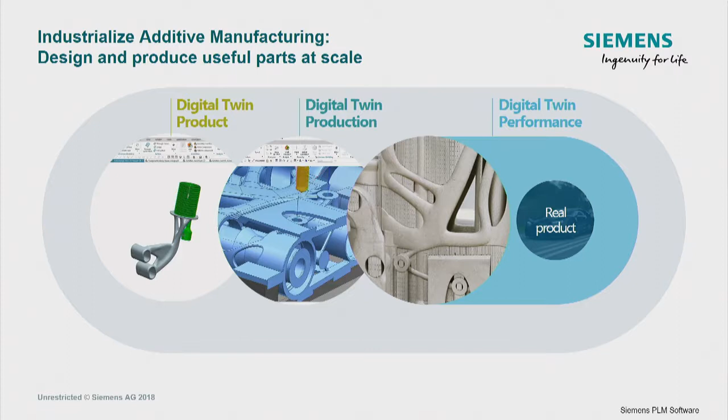So we're doing the same thing now for additive. By the time you get to the product out in the field, we're able to monitor that product and take that feedback from the field, from manufacturing, from the simulation, and continuously bring that back in for a closed loop system back into the design.

So you're doing continuous improvement over and over again on your products. That's particularly important for additive manufacturing, because in a production environment, I'd say about 80% to 90% is still between the engineer's ears. All the wonderful tools and AI we have for conventional manufacturing design, those things aren't there for additive yet.

So we have what I call a healthy impatience with our customers, because they're so used to having all these capabilities in conventional mode - we know how materials react, how automation works, we can pull off just about every piece of information off a PLC. But when it comes to additive, that's where the work is. We're working very hard to have a system available to facilitate that.

And that's what we did for Bugatti. If you want to see me afterwards or get in contact with me, there's a nice video from Mr. Götzke talking in more detail about what we did around this Bugatti wing.

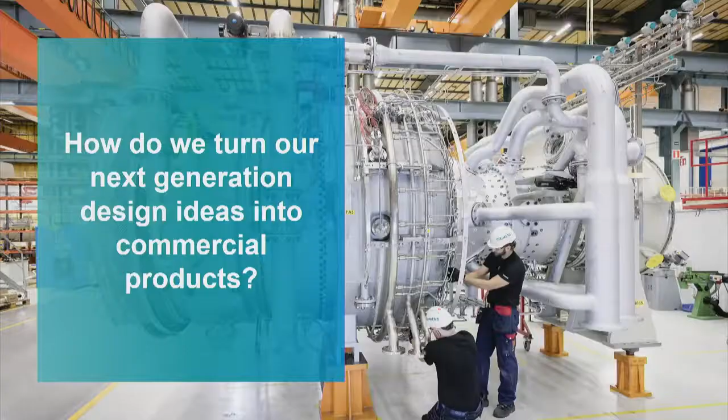If you think about one of these burners that we have for our power generation, we had to come up with a way to make it more efficient, require less maintenance, and use less fuel. We had a situation in a sales environment where we were in a competitive state, and that was an issue. So we had to figure out how to innovate quickly. Instead of redesigning the entire power unit, we decided to focus on one particular item, which is the actual burner.

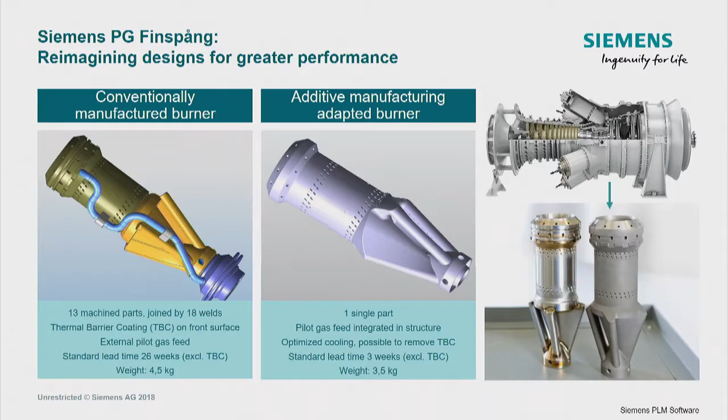So the conventional approach, on the left-hand side, was made out of 13 parts and joined with 18 welds. It required a thermal barrier coating on the front, and we had to have an external pilot gas feed separate to that. The lead time started at around 26 weeks, without the thermal barrier coating, and it had a weight of 4.5 kilograms. I don't have the actual burner assembly with me, but I have the mini-me version - if anyone wants to see this later, come talk to me about it.

So when we went through the whole design for additive manufacturing process for this burner, we redesigned it to one single part. The pilot gas feed is now an internal component within the one part. We optimized the cooling, and in some cases removed the need for the thermal barrier coating. The lead time has gone down to 3 weeks, and we also reduced the weight down to 3.5 kilograms.

As I mentioned before, it's very important for us within Siemens to industrialize additive manufacturing, just because we produce products just like most of you folks out there. So we're very motivated to make sure we're on the cutting edge with additive manufacturing.

So how did we go through that exercise on the burner? Same thing - we invoked a digital twin, and made sure we validated and designed everything in the virtual environment. Then when we were ready to print, all we needed to do was make some tweaks. Again, a lot of the information is between the engineers' ears on making a repeatable part successful today, and then doing the continuous improvement loop.

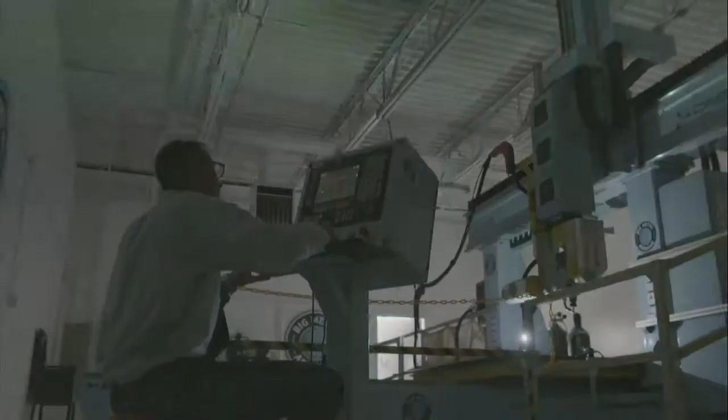Imagine that you could design and build the car of your dreams as easily as playing a video game. The Hackrod digital manufacturing platform, powered by Siemens, is connecting virtual reality with artificial intelligence and advanced manufacturing to make this dream a reality.

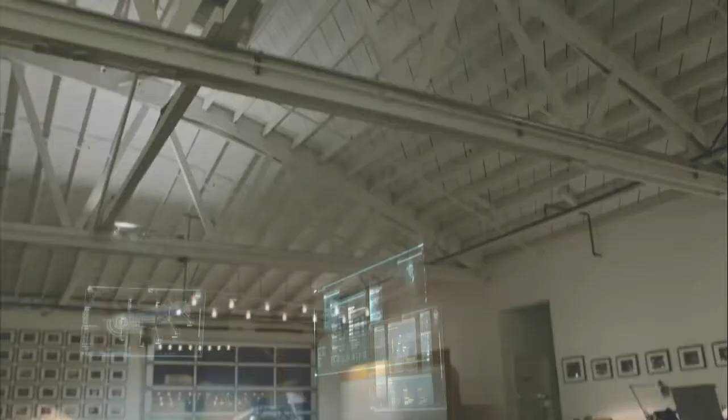To prove this out, we started by sketching La Bandita, the car that we wanted but nobody made, quickly moving from sketch to full-scale photoreal 3D model in virtual reality, allowing us to perfect the design and aerodynamics digitally. Moving back into the physical world and connecting with the Internet of Things, we deployed sensors and scanners to capture 50 years of automotive knowledge.

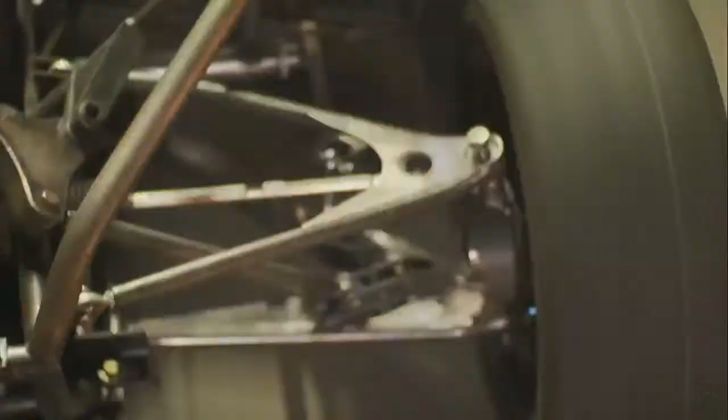We harvested massive data sets and used them to teach the artificial intelligence generative design engine what a car experiences. With artificial intelligence and machine learning, we have the power of hundreds of engineers at our fingertips, allowing us to grow optimized engineering solutions for our design requirements.

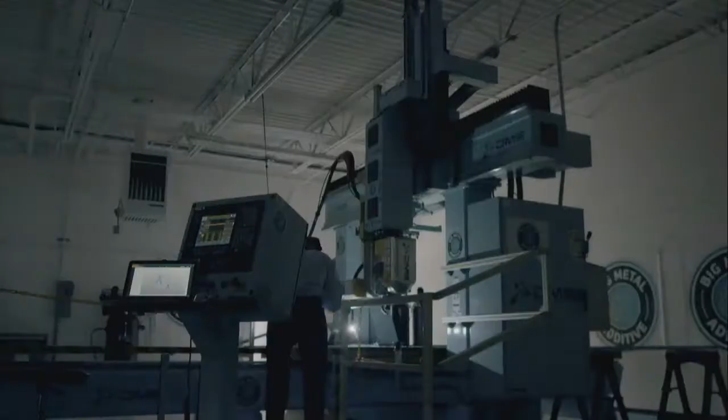These designs are too complex and expensive for traditional manufacturing. They have to be 3D printed. The synergy between Siemens software and hardware is allowing us to lead the way in large-scale 3D printing.

Really going well, Jim. We're doing things that have never been done before. The fact that we'll be able to optimize for manufacturing and buildability, it'll open the doors. We'll be first. It's a realization. It's not pixie dust and unicorns.

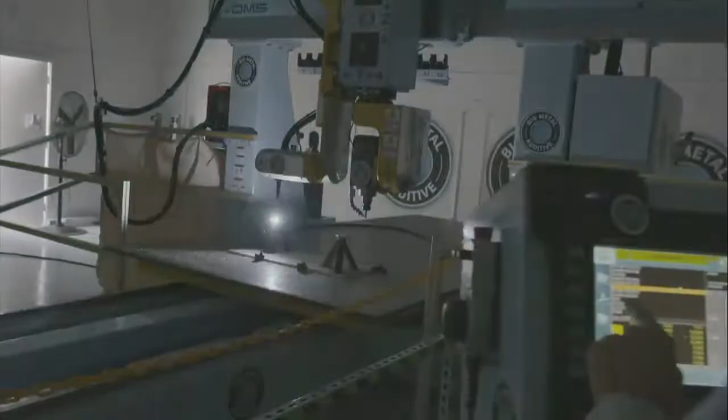We are now printing a full-scale car in aluminum. La Bandita is not a concept car. It's a proof of concept of an entirely new way to design and manufacture. And if you can build a car this way, you can build anything.

So that's the journey that we're on. We went very quiet for about 4 years. We birthed 2 sister companies, the 2 largest printing systems in the world: Big Metal Additive and Center Street Technologies, one in Denver, Colorado, the other one in Youngstown beside America Makes.

We're printing cars, but we're thinking differently about that digital thread that runs through it. And that's why it's so important for us to work with partners like Siemens. I'm going to walk you through a little bit more of what we're doing with the printing systems. But I have to stress that these digital revolutions have collapsed industries that thought they were fairly immune to this type of change.

If you were in a rock band in the 90s, you had spent 30 years mastering your art, getting into studios. By 2004, Apple releases GarageBand. Now kids are releasing albums in their bedroom. They're making millions doing that.

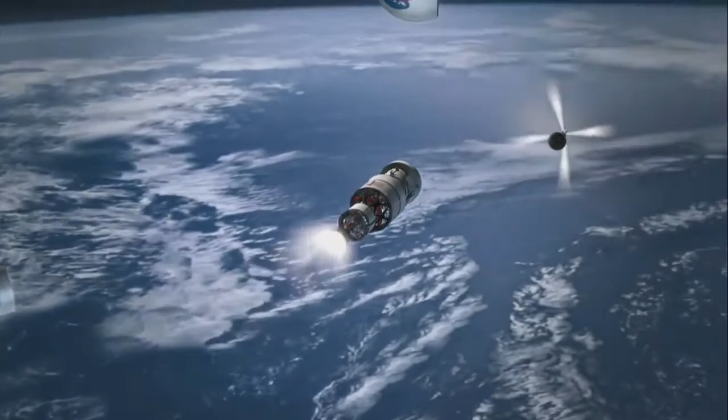When I was at Skunk Works, I had access to a lot of very sophisticated aerospace tools. I wanted to share these things. I wanted to create the kind of manufacturing capability that someone with less experience than me could use to build whatever it is of their dreams.

Hackrod is in the perfect position. We're a brand new company, a clean sheet. We can make all of the right decisions coming out of the gate.

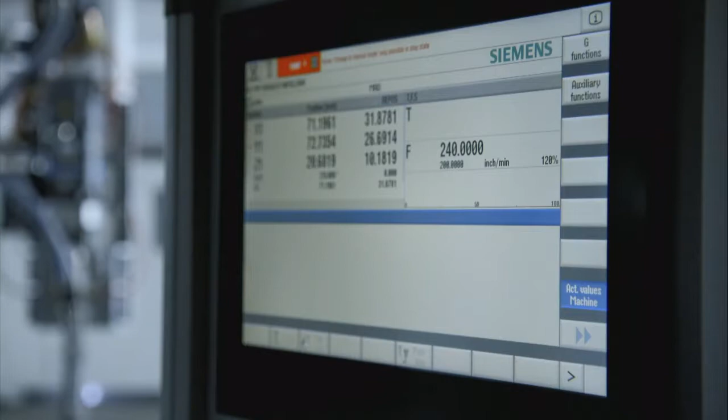When your goal is design without compromise, you need to transfer your design to your manufacturing in the most efficient and complete manner. We're taking advantage of the synergy between the NX software and the Sinumerik controller hardware. And when the Siemens software talks to the Siemens hardware, everything is smoother. Our machine, driven by the right software connected to the right hardware, gives a faster, more efficient overall operation.

My vision of 3D printing is much bigger than most people.

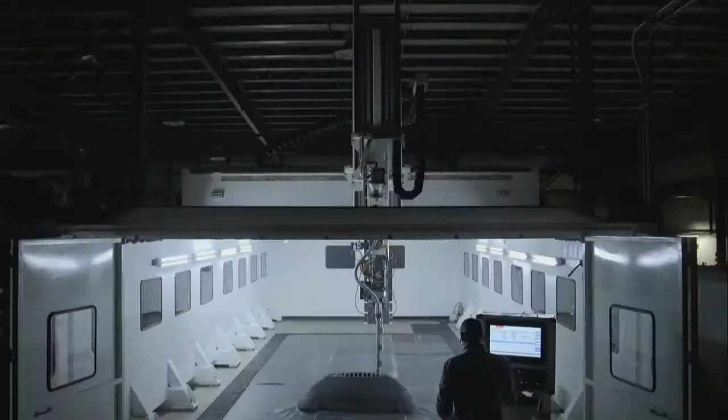This machine is 12 foot wide, 25 foot long. You could drive a truck inside this 3D printer. It has 8 foot of Z-axis. This machine is probably the biggest 3D printer right now, but more importantly, it's the most capable.

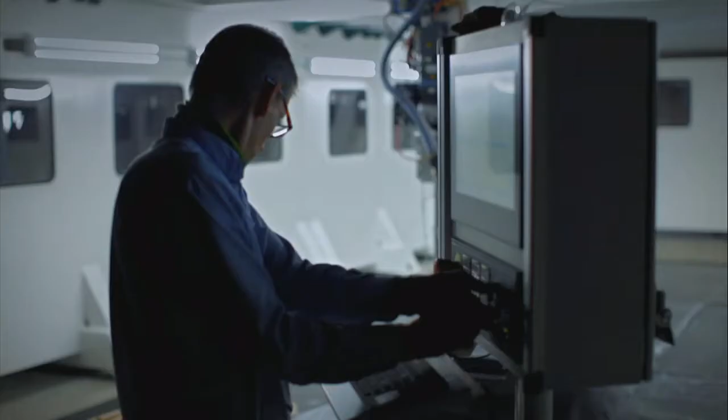Because this machine combines additive extrusion-based 3D printing with 5-axis CNC machining and high-fidelity in-situ automated metrology. That's a game changer. We're printing the body of the Hackrod La Bandita out of a carbon composite material, and it prints it oversized. It's a little rough, but that surface is going to be scanned with automated integrated metrology. Those data are then used to locate the part inside the preform.

And then a multi-axis CNC operation reveals the beautiful body part. It deposits, machines, and validates. It's able to generate a product and a digital twin all at the same time.

This technology enables the creative person that may not have the budget of a large corporation to pursue their dream, to pursue their manufacturing or their creation dream.

So through that partnership with Siemens, there's something really important Slade said, and that is that we're creating a digital twin out of the build. We're actually recording, we have in-situ monitoring for every serial number part that comes off the plate. I've got a serial number matching it up to a digital file. Now we're talking about being able to control for quality, being able to control for traceability, and having a full CAD to product back to CAD system integrated into one platform.

And the other thing that Slade said, I really want to emphasize, is that we're trying to make these machines affordable, trying to make them available. These should not be only available to a PhD metallurgist who knows how to handle powder and operate a vacuum chamber. No, that's not the future. We're dealing with non-reactive materials on open cells, base plates, and we're going big with that technology.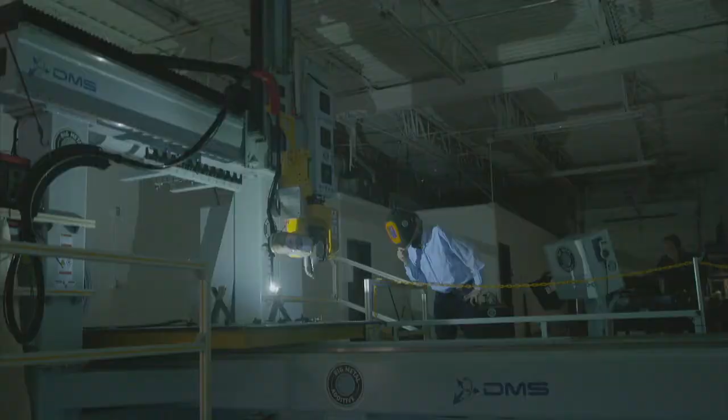This is our large metal machine. We're 12 feet by 6 feet, 40 inches of Z. We can print whole automotive chassis on that machine. It's exactly what we're doing.

But what's particularly interesting about this machine is we have a tool swap out. We can do machining and deposition at the same time. In fact, we require it, because when you're talking about multiple welds, I want to have a nice smooth surface. We print on a smooth surface every time. We record that. We create a digital twin out of it. And I have forgiveness in my structure when I print this way. And I can print fast.

And the vision, as I started the talk, is to democratize this. I want those 3 kids to make a car company. Right now, if you make a car company, go ask Elon Musk if he's having a good time.

That's where I want the machine. I want the machine available to the public. I want it available to those 3 kids coming out of a dorm room, who aren't necessarily mechanical engineers, but they've got access to the right types of tools, the right types of facilities, and they can reach across this convergence of capabilities. Physics-based game engines.

Forget the millennials, Generation Z, they're all digital natives. I'm a digital immigrant. I remember the pain of dialing 9, okay? The kids think magazines are broken iPads. There's an expectation for mass customization. The tools are in our hands.

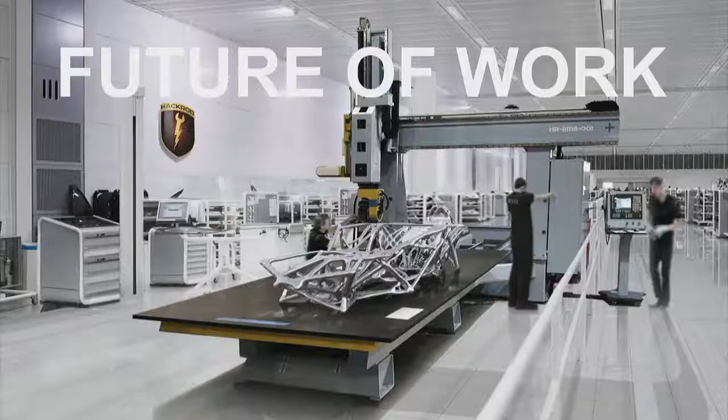I think vacancy is an opportunity, guys. Bring manufacturing home, re-democratize it. Why aren't we letting kids play? All the tools are there. Go build companies. Go realize that convergence. Get rich doing it. Have some fun.

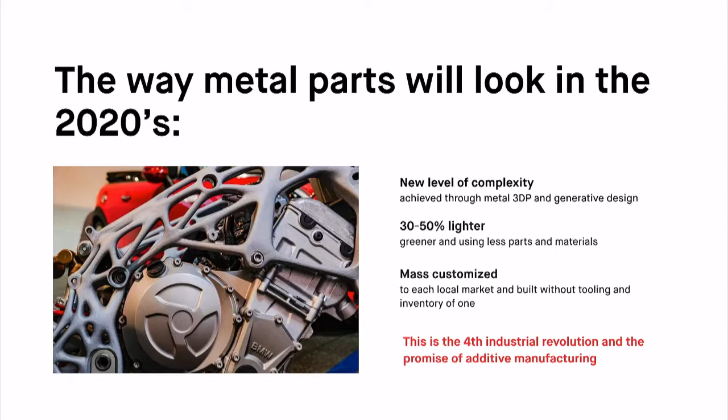Really, with the same materials, you'll be able to make parts that are 30 to 50% lighter, reach a new level of complexity, and do mass customization for different markets. And this is really the promise of the fourth industrial revolution that we've heard a lot about.

We also will be able to increase the percentage of recyclable content in vehicles. There's an effort by the UN and World Economic Forum on something called circular mobility, which allows you to essentially have more content promoting more content that's fully recyclable inside automotive products. And I think, while it's not a big deal today, I think in a decade, that's going to be more important.

With 3D printing, as you know, you can do mass customization. You can do things like generative design. I have some parts here — this skateboard truck was modeled in our Live Parts software, and you can get a significant weight savings. This is a multi-physics generative design tool that we've made available to the market, and has a number of features that are unavailable in other products.

Like the ability to do dynamic loads and also do more than just loads. The engine in the future will be able to do thermal and optimize for flow and other things like that. So it's an exciting project that we have inside our company.

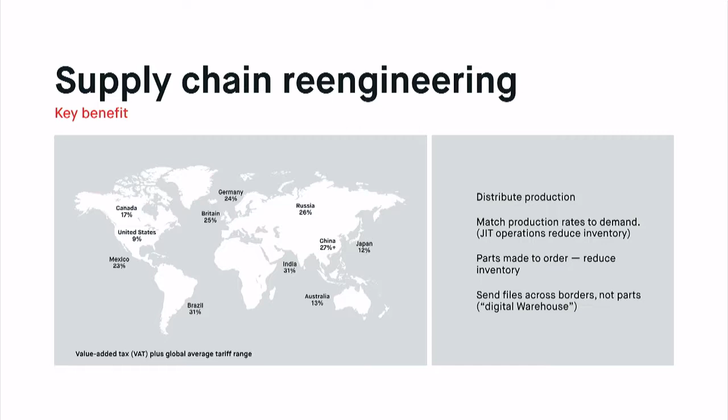Other benefits of 3D printing, as you know, include supply chain reengineering, the ability to print locally what you need and not have to inventory parts, things like that. And do assembly consolidation.

This is a presentation — I'm borrowing 3 or 4 slides from Audi, who did a very good job at a recent talk. But this is an example of a part that's in powder bed fusion, which is currently, I would say, the existing technology that people would look at for metal printing, where they took a component that was a casting and took 12 parts and converted it into a single part. In that vehicle, the R8, they have 200 kilograms worth of those types of parts, so it's a significant benefit to be able to 3D print them.

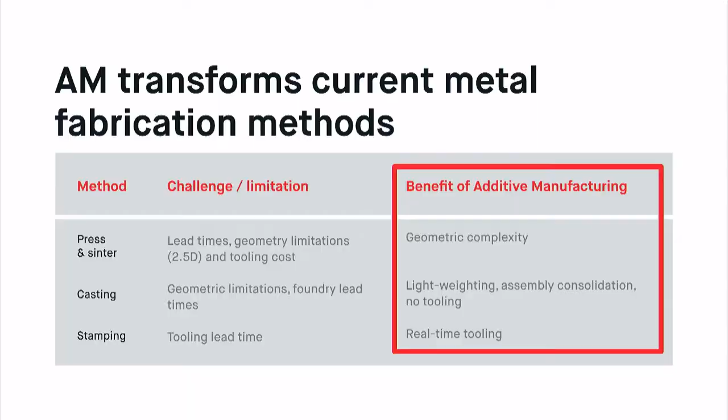And really, you can change existing processes and gain new benefits. For example, versus press and sinter, you're able to get new geometric complexity with 3D printing versus castings. You can lightweight with generative design and assembly consolidation. In stampings, you can now do the 3D printing of the tooling and have more evolution of your designs, which is, I think, a big deal.

This is that example of castings going to AM, where that vehicle, which has 200 kilograms of those parts, can now go to a generative or topologically optimized setup where they save a lot of weight per part.

But there's challenges to this technology, and it's not broadly adopted yet. It was designed primarily for aerospace initially. And when you think of the challenges, there's three major areas that are a problem. One is you can't use the standard types of materials that you would want to use in automotive. Things like 8620, 4140 are difficult to print with powder bed fusion.

It's also very, very expensive — almost $1 million of capex per metric ton produced per year. That's ridiculously expensive as a production process. And it's not fast, so it's difficult to take it to production. You have to find really specialized applications. And finally, the raw materials for powder bed fusion are in the range of $60 a kilogram, so it's very expensive.

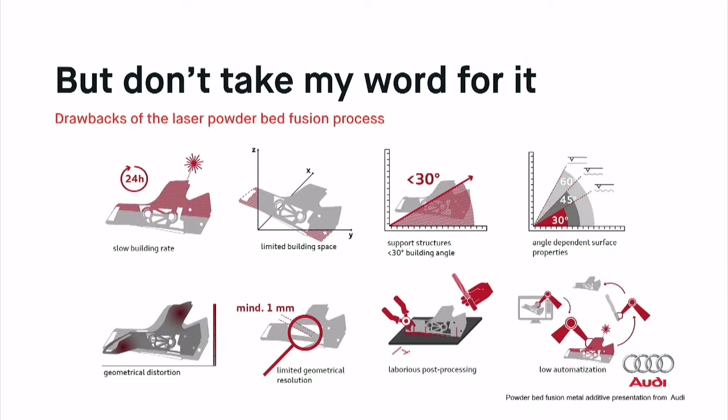So those are the major challenges for that technology. And if you step away from cost and speed, you have other issues like supports and lack of automation in today's processes, which leads to very high cost.

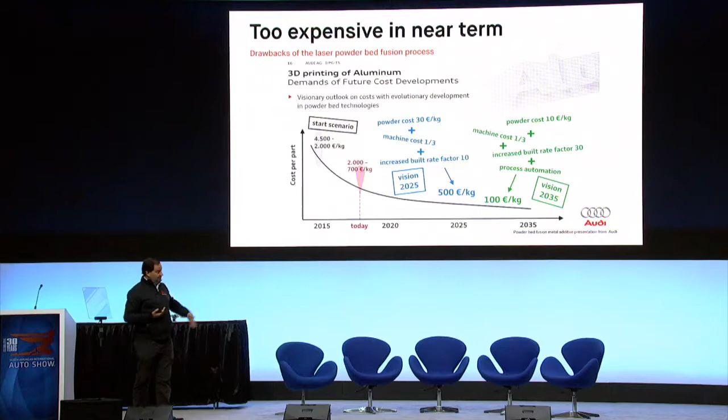This is a model from Audi from that same presentation, data from an expert presenting what they think the cost structure of powder bed fusion is today. They put it at approximately 700 euros per kilogram of part. I don't know that there are many components in a vehicle that cost 700 bucks a kilo. They say that if you do X, Y, and Z, by 2025 it'll be 500, and if miracles happen, by 2035 maybe it's 100.

So I'll tell you a little bit about my background. I worked in automotive from 2002 through 2010. I started a company that was a major supplier to many OEMs. After that, I became the original backer of a company called Protolabs. Protolabs, who you may use in your prototyping setup, is today a $3.5 billion market cap company. At the time, it was a startup when we got involved.

But in 2014, Protolabs said, we're going to go into metal additive. And they ended up acquiring a company called Fine Line, which had 12 concept laser machines. At the time, it was the largest customer for concept laser. And that was my first exposure to metal printing, which is the reason we ended up starting Desktop Metal.

Seeing all the difficulties in producing parts with powder bed fusion sparked the idea that we have to separate the shaping of the part from the thermodynamic processing of the part, so that you can reach the cost structure that makes sense, and use materials that are inherently inexpensive from the beginning, without needing oxygen control of the raw material, which drives a lot of the costs in alternate technologies. So our approach is quite different—it's more similar to the way you do powder metallurgy today in volume in vehicles.

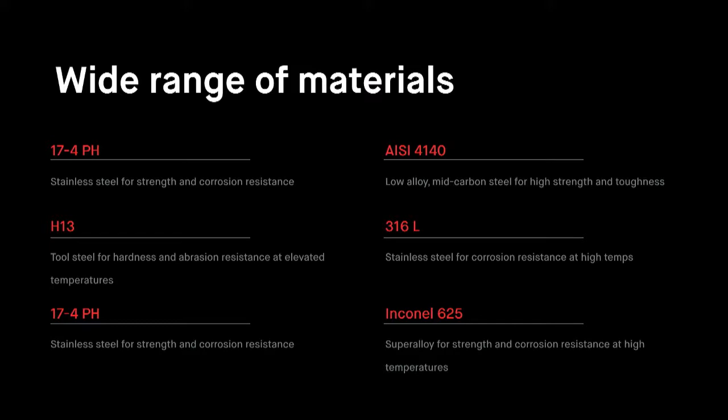This is the first office-friendly metal printing system available in the market. It's very affordable compared to a powder bed fusion system of similar build envelope. You don't need respirators or 480-volt three-phase power or special facilities. And you have a wide range of materials you can print with this process, many of which aren't available to powder bed fusion. Things like H13 or 4140 are materials in very high demand in the automotive space, but unavailable and unattainable with powder bed fusion. So that's some of the areas where this technology is very, very attractive.

Or things like copper, which isn't on this list, but is a material compatible with our process. If you're doing electric vehicles and want to 3D print electrical components, that's a very interesting technology. And it's very easy to change materials—it takes under 1 minute with our Studio System, versus having to spend a whole day cleaning a powder bed fusion machine and risking contamination.

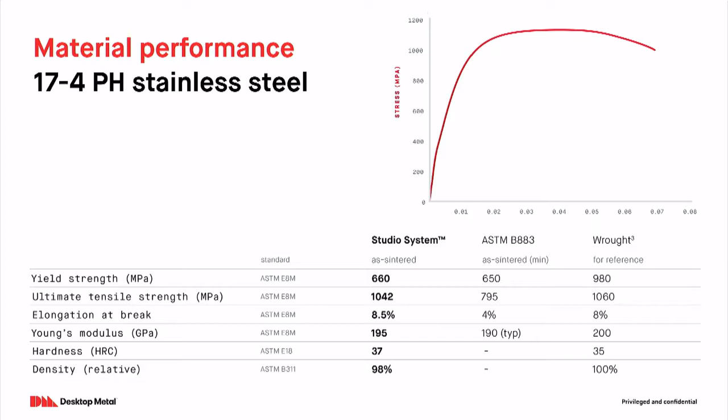So you get parts that are similar to casting. They're near net shape with properties comparable to MPIF 35. So it's between a casting and machine rolled stock in terms of what you get on the other end. Now let me switch topics and talk about our production system.

This is a platform that is going to evolve over time. Our initial system has a build envelope that's 330 millimeters cubed. It can print parts at about 8 liters per hour. The second evolution of that machine has a 750 millimeter long bed, much larger than a typical powder bed fusion machine, and that prints parts at 12 liters an hour. But this architecture can scale in the future to faster speed.

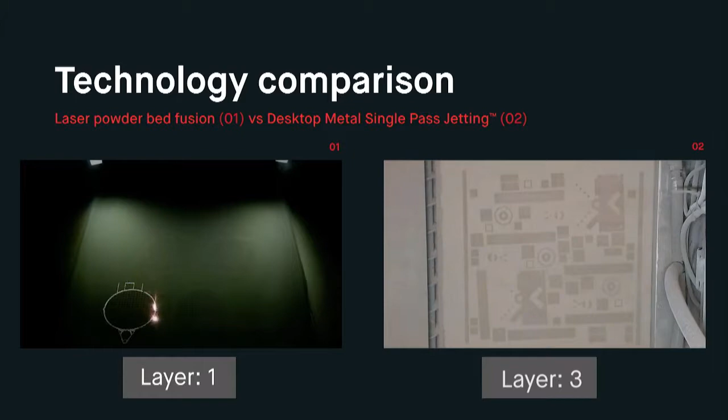You see some pictures here of the process. It's approximately 2 seconds per layer, which is very fast for an additive system. On the left, powder bed fusion is a vector-based process. It's kind of like comparing a dot matrix with a laser printer in terms of throughput and speed. And you're doing this with raw materials that are 80% cheaper than the raw materials used in a powder bed fusion system.

So significant benefits. There's a lot of special technology we've put into this machine that is not available in any other binder jet process, like the ability to have a constant wave, so you can have very long spreading with the same powder bed uniformity throughout the bed. We have a proprietary separable supports technology that we use in our studio system, very unique to support parts. The entire machine is built with hot swappable modules so you can be up and running if you ever have a component with issues. And it's upgradable over time.

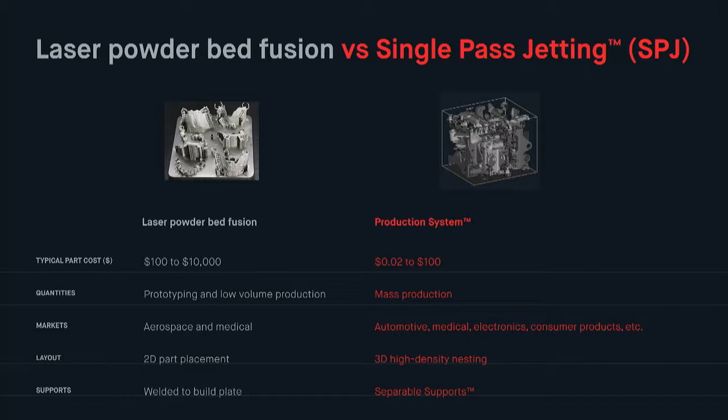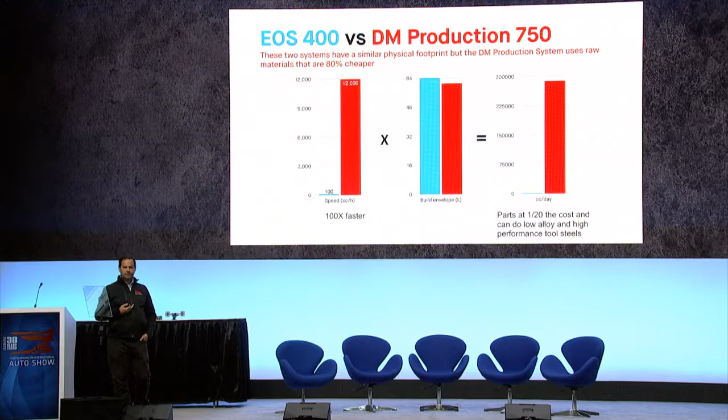Again, when you compare it to powder bed fusion, you end up with parts that are dramatically less expensive than conventional systems. For example, an EOS 400, there are trade-offs to our technology and I'm happy to talk about it, but if you compare an EOS 400, which is the fastest machine from EOS, they're about 100 cubic centimeters per hour. Our production 750 machine is 12 liters an hour. Similar build envelope, dramatically higher productivity. And they are not able to do things like H13 tool steels or 4140 or a lot of the materials actually used in industry.

If you compare it, for example, to other binder jetting systems like the HP Metal Jet, our inherent speed is about 4 times faster with a build envelope that's much larger, giving you much better productivity per day. And then we have some advantages to the way our process works in that we have the ability to inert our system,

so we can work with reactive metals. We have solvent recovery. Our process uses piezo heads, so that gives us the ability to work with solvents, which means we can work with low alloy steels. We can work with reactive materials. In the world of thermal inkjet, which is what HP uses, you can only work with water. And if you work with water, it's going to be very difficult to do low alloy steels reliably, and very difficult to do reactive materials. So those are some of the differentiating features.

This is an example part that we show often, an impeller that BMW took to production. It's for a water pump. They took that to production with powder bed fusion. The cost was about $80 for that part. We can mass produce this part with our process around $5.60. So dramatic cost reduction. This is what it means to have a process that can take you to production with 3D printing.